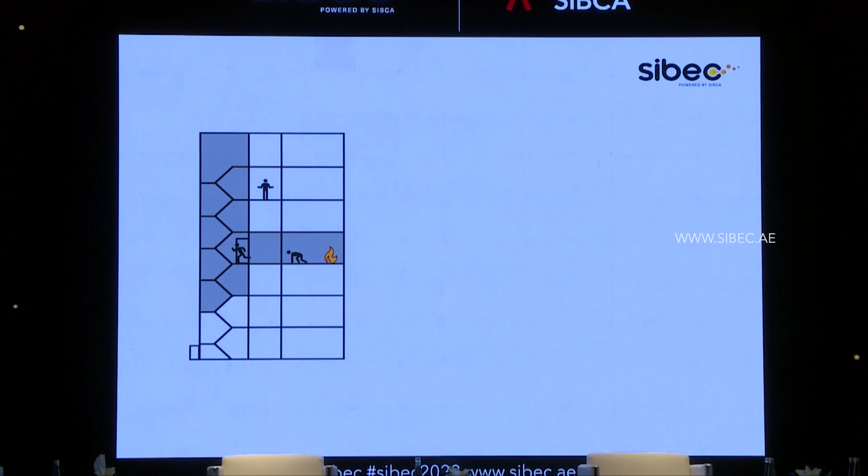So smoke spreads quickly, significantly reduces visibility, increases panic. It makes evacuation very difficult. It makes the firefighting operation very difficult, if not impossible. And for this reason, Fire and Life Safety Code of Practice orders evacuation routes to be protected against smoke penetration in public buildings and in high-rise ones.

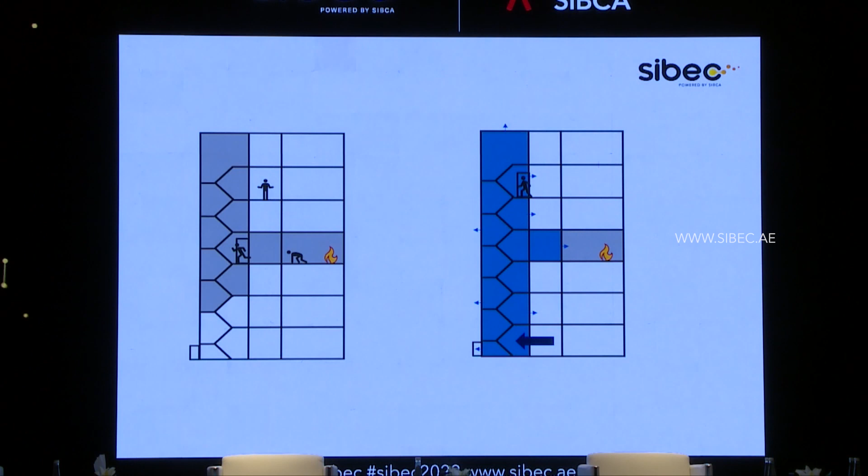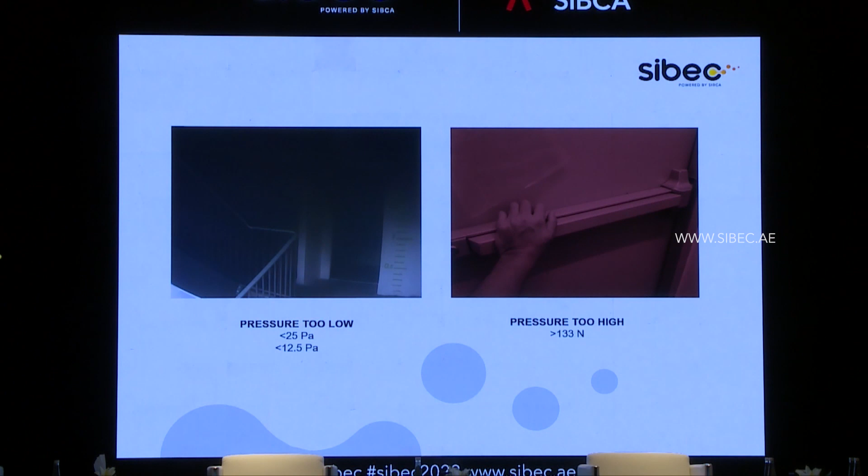To do this, we have to supply certain amount of air into the stairwell space to create overpressure in relation to the fire-affected story. The precision here is very important because the overpressure has to be high enough to stop the flow of smoke if someone opened the door on the fire-affected story, but not too high, so this door can be actually opened. So pressurization system operation is a constant balancing between those two values.

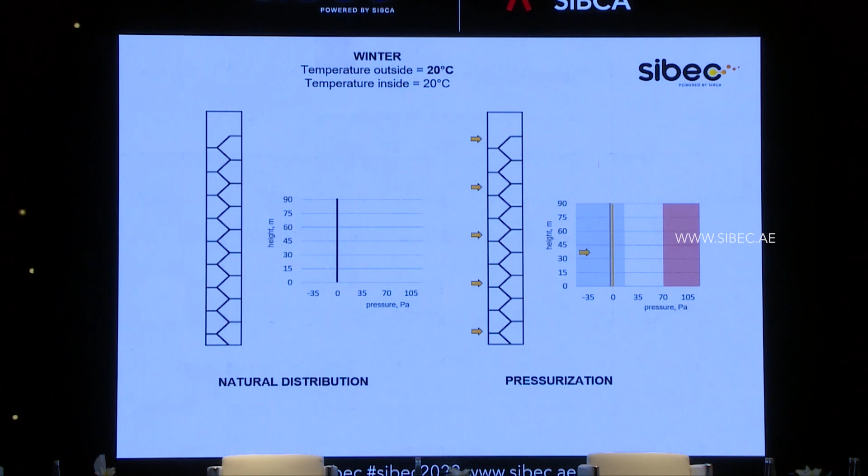Pressurization is very simple under easy conditions. We just supply air until we reach a certain overpressure value. It is like that in isothermal conditions, so when outside and inside temperatures are equal. We in Europe call it spring, but here I called it winter, but you have to be aware that it can occur also during cold night. So the difference between temperature is important here.

And why is that? Because the pressure is affected by many static and dynamic factors, but for tall buildings, it is the temperature that has the greatest influence. It creates something that is called a stack effect, and stack effect is a directed air movement due to a difference of air density.

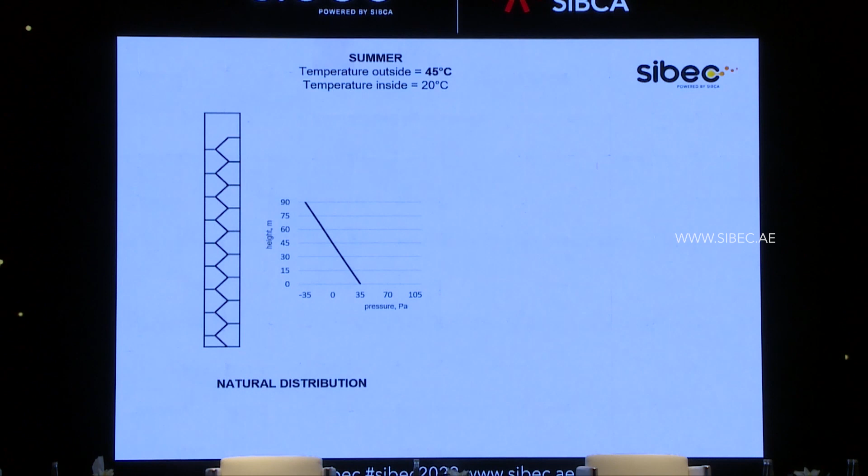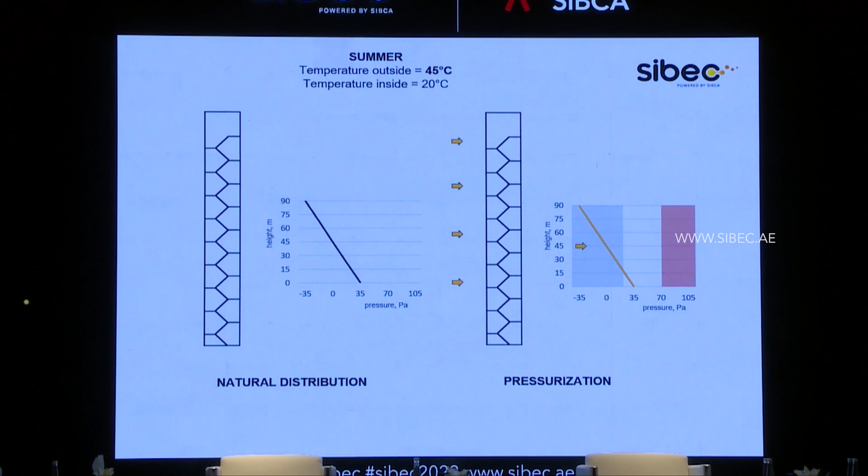In hot climate, the direction is from the top to the bottom. So we have negative pressure at the top and positive pressure at the bottom. And why is it so important? Because if we pressurize the staircase, we move the pressure range, but we don't change the pressure spread. So the difference between top and the bottom pressure is still the same.

The basic way of doing pressurization system is to use a constant flow fan with a pressure relief damper. It is usually located at the top of the building, but in hot climate with this reverse stack effect, it does nothing to mitigate stack effect.

For this reason, to be intellectually fair, I have shown here example of pressure distribution of 90-meter high building with the system with the pressure relief damper on the bottom. And as we can see, depending on the season of the year, of the difference of temperature, straight line is winter and dashed line is summer, we have very different conditions in the building.

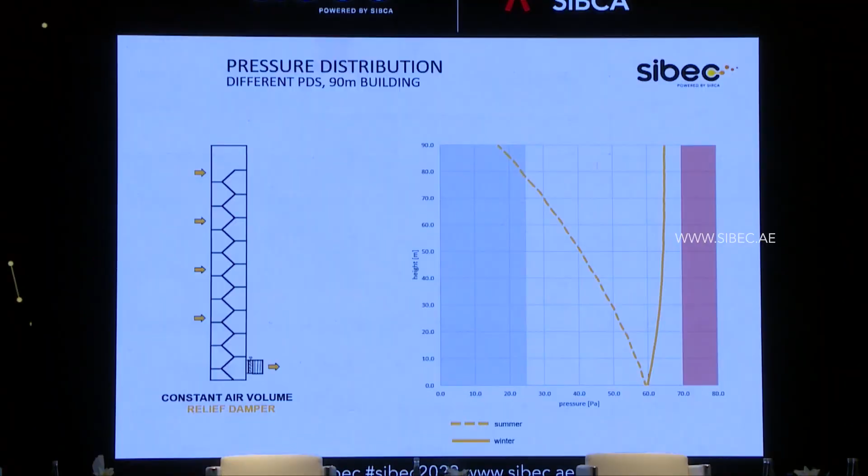And what is the problem with this system? Pressure relief damper controls the pressure only in its surroundings, so it has very limited influence on the pressure in the entire building. And the second problem is that those systems are static, so they cannot respond to dynamically changing conditions in the staircase.

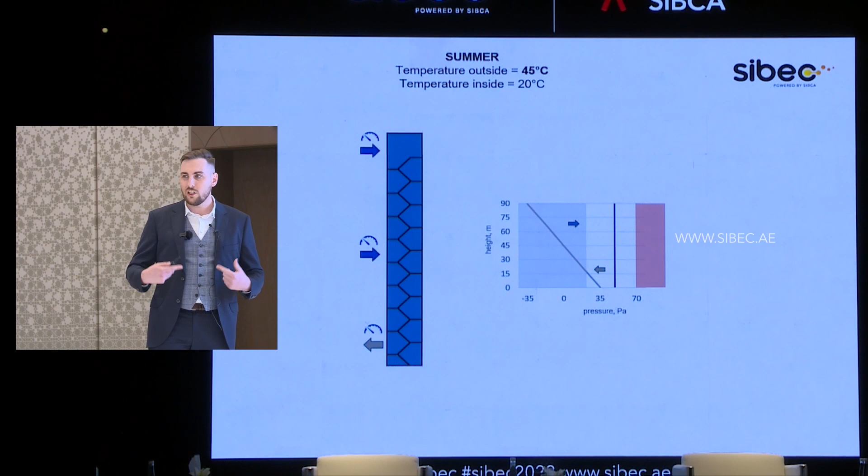The solution we developed and patented is very simple. We supply air to the under pressure zone and extract it in the opposite side of the staircase. But what is also very important, each fan is variable air volume, so it adjusts constantly to the changing condition inside the staircase. And thanks to that, we can obtain even pressure distribution in the entire height of the staircase, regardless the outside temperature.

Thanks to that, we can ensure the best evacuation and firefighting conditions.

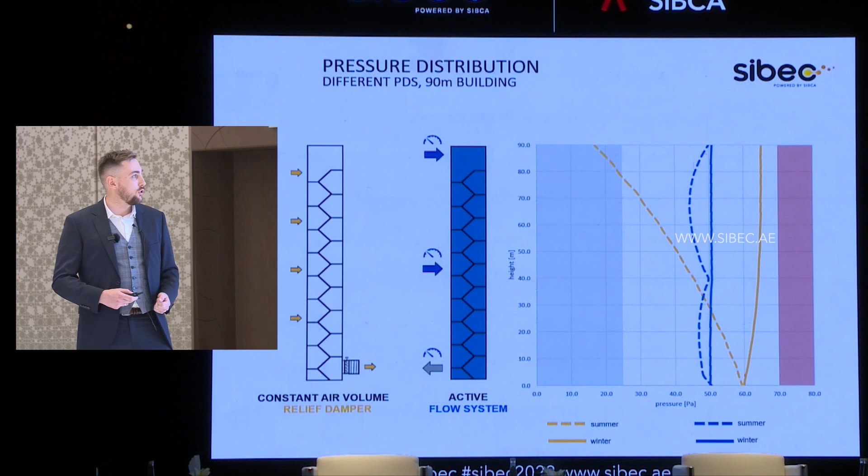And what about super high-rise buildings? Fire and Life Safety Code of Practice orders to divide staircases into sections not higher than 90 meters, or to use a pressurization system that counteracts the stack effect.

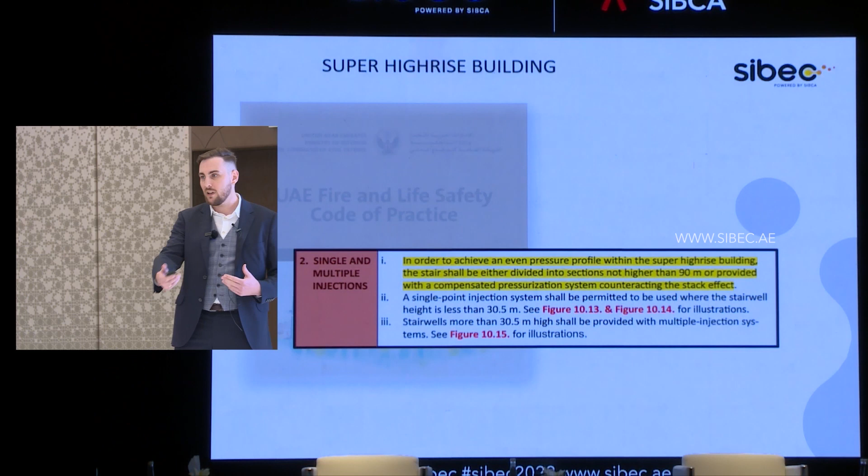And why is it better to use the second option? It is for two reasons. Firstly, we can save the space that would have been used for a second stair and passageways for commercial use. We can have profit from that.

And the second reason is that separation of two staircases creates two pressure distributions, but only as long as those spaces are actually separated. During the evacuation of a skyscraper with hundreds of evacuees, it won't be - as soon as the separation door opens, pressure tends to equalize. So we have one pressure distribution, like in a 180-meter high building.

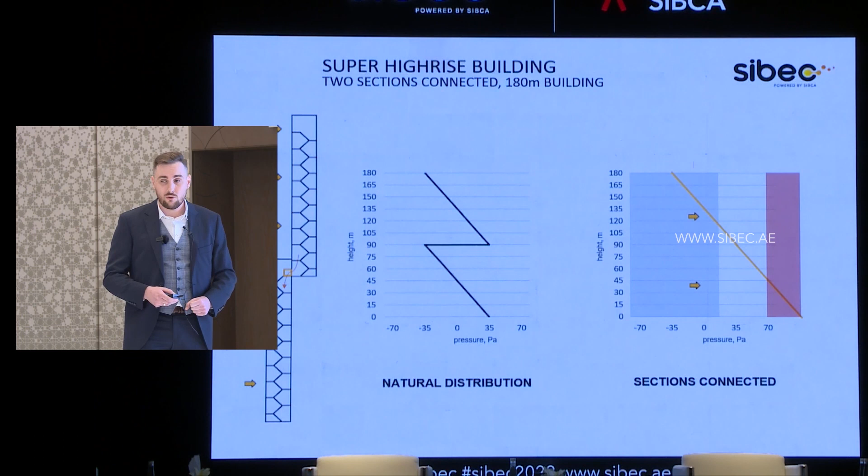Again, when we pressurize it, we move the pressure range, but we don't stop this pressure spread. And pressure relief dampers don't solve the problem, because as we can see here, in a summer situation, if fire is on the top floors, there is a very big risk of incoming smoke to the staircase, while during winter, during a cold night, people here will be trapped regardless of where the fire is.

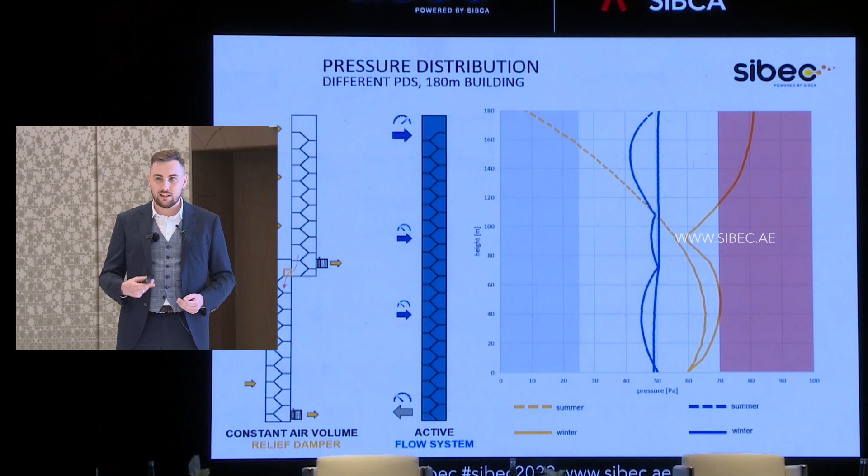Our system can keep the pressure precisely across the entire height of the staircase, and what is more, we don't have to split the staircase, so we can use the spare space.

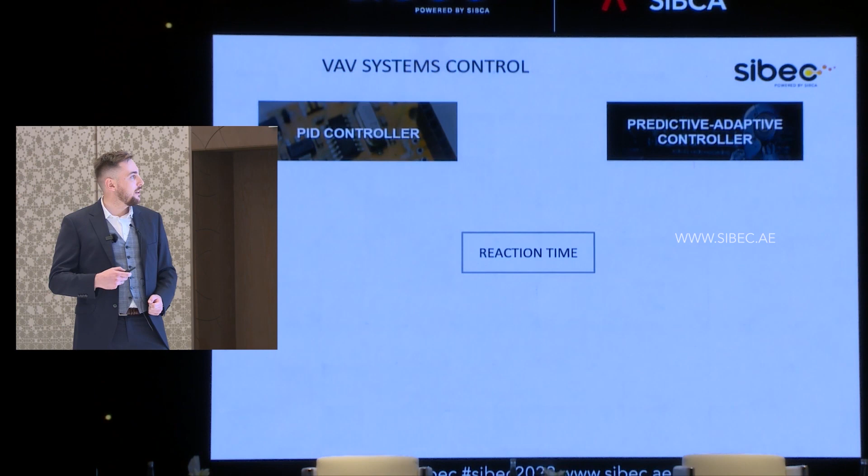As I said before, we have to change the air volume depending on the conditions in the staircase, because someone opens or closes the door and this changes the pressure inside. Usually a tracking controller is used for this, like PID. It changes the output value constantly until the input value, which is the pressure measurement, meets the required value.

It takes time - that's the first thing - but there is also a problem that the faster they work, the more unstable they become. So there is a risk of oscillation if the pressure is changed frequently.

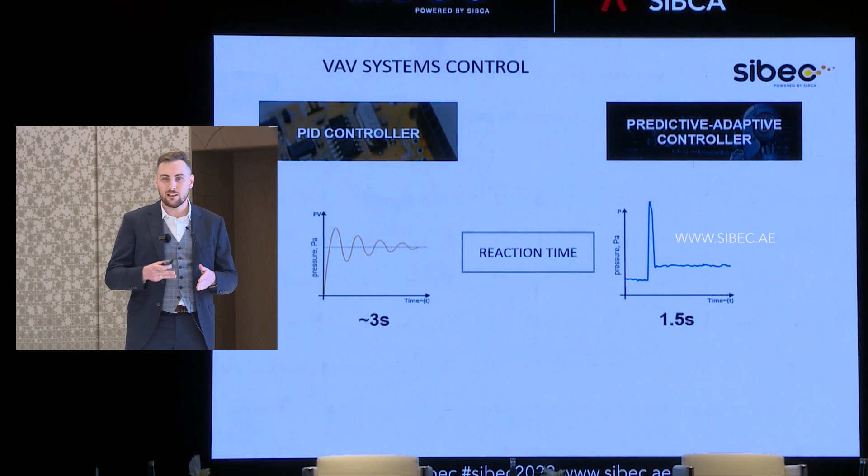For this reason, we use a predictive adaptive controller based on a neural network that is constantly learning. So from the first cycles, our device remembers in which event configuration what frequency it has reached, and thanks to that, in case of a sudden pressure change, we know exactly what frequency we have to reach.

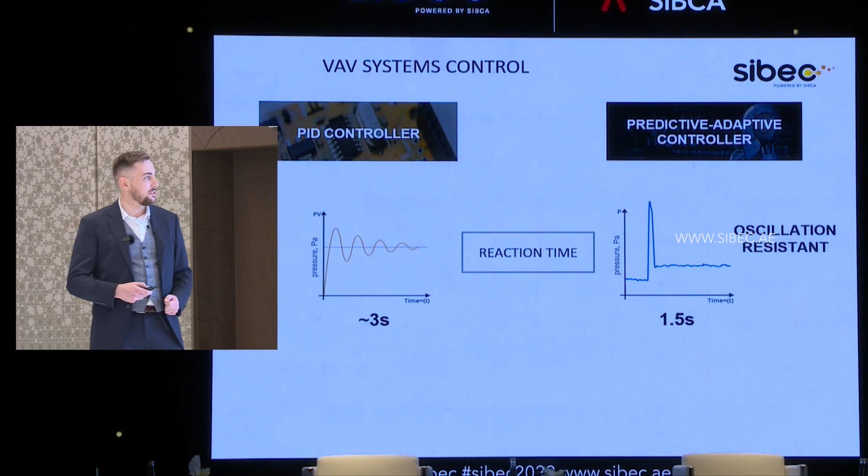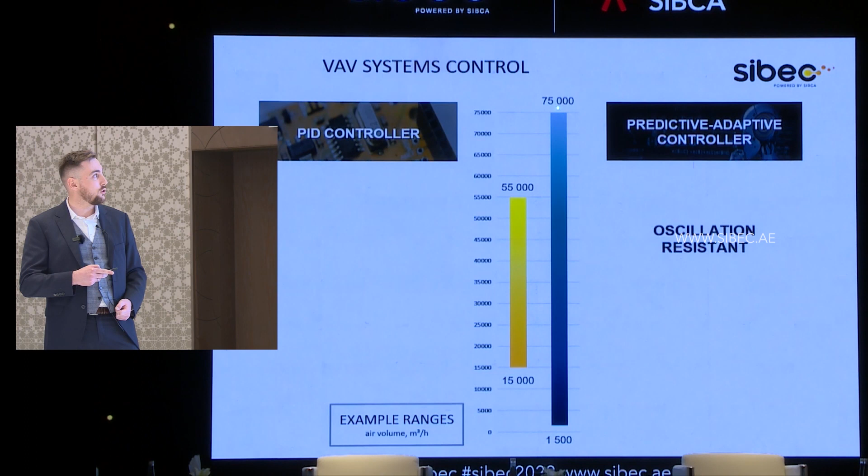Thanks to that, we have a much faster response, and our system is oscillation resistant. What is more, thanks to that, we can have a much bigger operation range. So it gives a lot of flexibility to designers, because they can use the same unit for example for a very small airtight space but also for a very big staircase. There is no problem with that.

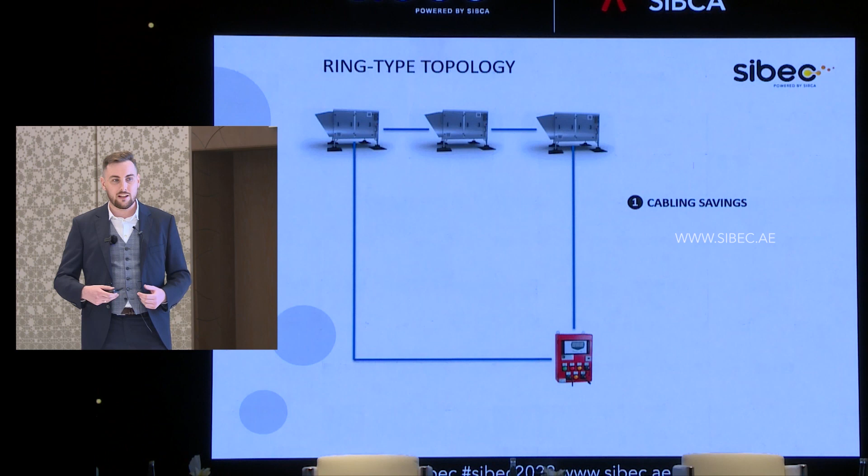In our system, we use a ring type topology, so we don't have to connect each device directly to the control panel, which is a huge saving in kilometers of fire-rated cables, and we can keep the communication in case of loss of one line.

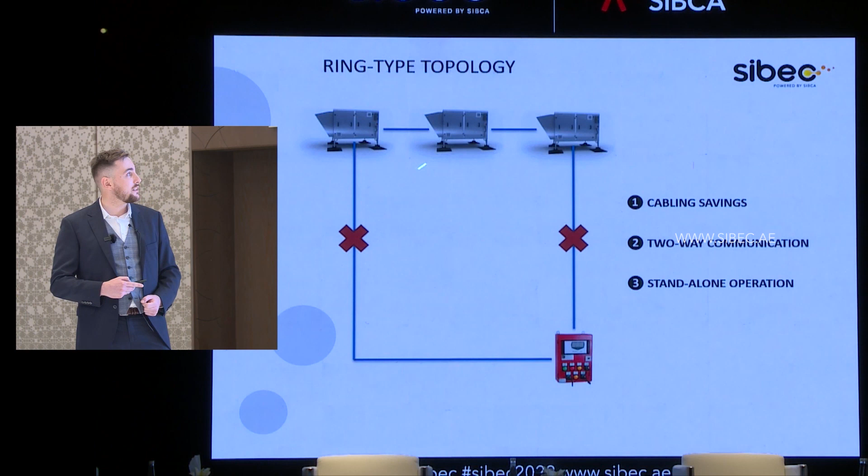But during fire, a lot can happen. So what will happen if we lose communication with the second line, you may ask? To be honest, not much, because our control panel is a fire brigade access point. So they will lose the ability to check data or reset the system, but all of the devices implement the algorithm by themselves, so they will keep going during the fire.

And to be sure that our system will be ready for action, we made it check itself every day. It opens the shut-off damper, starts the fan for a couple of seconds on a few frequencies. Data is collected, recorded, and can easily be printed in the form of a report. Thanks to that, we can eliminate any potential malfunction very quickly, and we can reduce the cost of maintenance and periodic inspection.

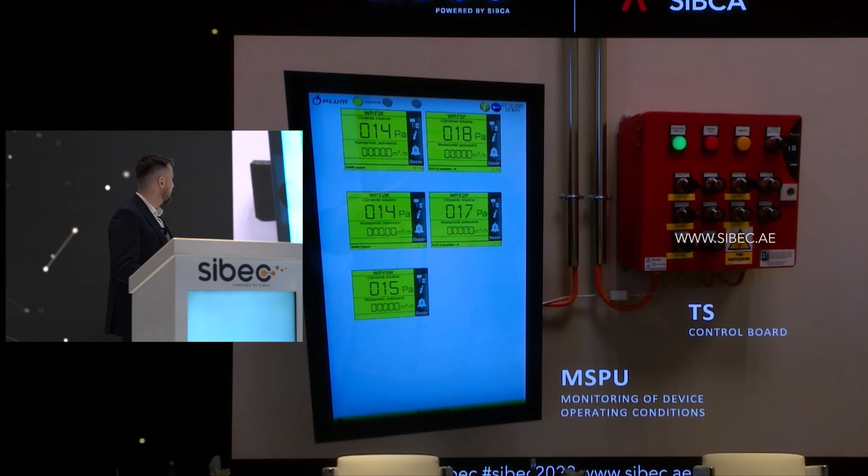For complex systems, we have a touchscreen panel for visualization of the entire system, and if you want to eliminate potential malfunctions very quickly, we can put a remote access router in the building. Then, if there is a need, we can diagnose the system from our headquarters in Poland, fix it if it's a software problem, or give instructions on how to do that if it's something else.

So in Europe we don't build as high buildings as you do here in the Emirates, but SMAY has received a lot of experience and proven the efficiency of its systems on dozens, if not hundreds, of buildings in Poland and abroad, including the highest building in the European Union, Varso Tower. So we are ready for going higher.

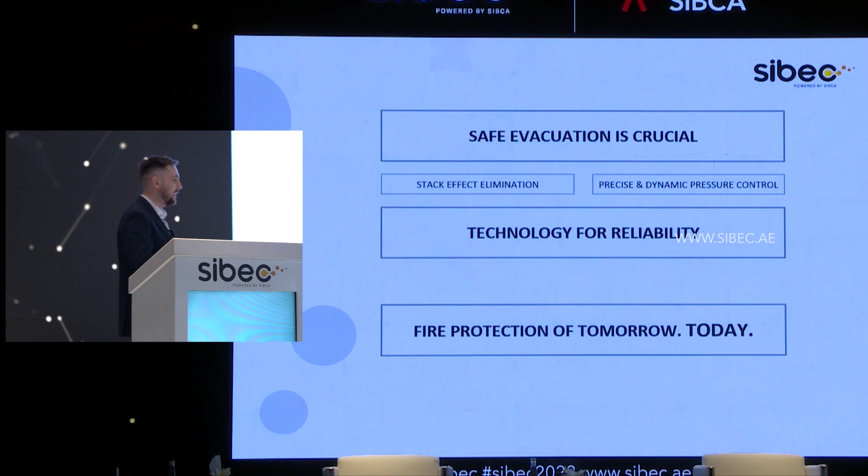And coming back to our leading thoughts - safe evacuation is crucial as high-rise fires are occurring with increasing frequency, and human life is priceless. For this reason, it is so important to use systems that can cope with the stack effect and can respond fast and precisely to the changing situation in the staircase during the fire.

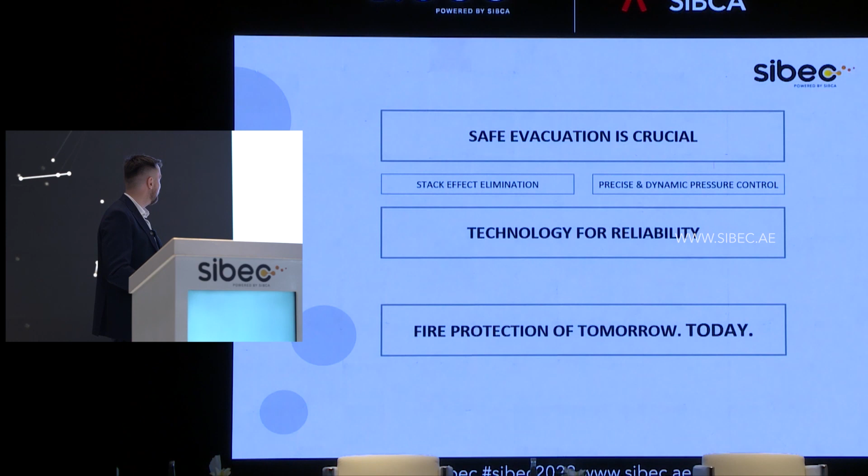And modern fire protection systems, like modern cars, have to be equipped with solutions that not only protect their operation during the most demanding conditions, but also allow for assessing their readiness during standby mode.

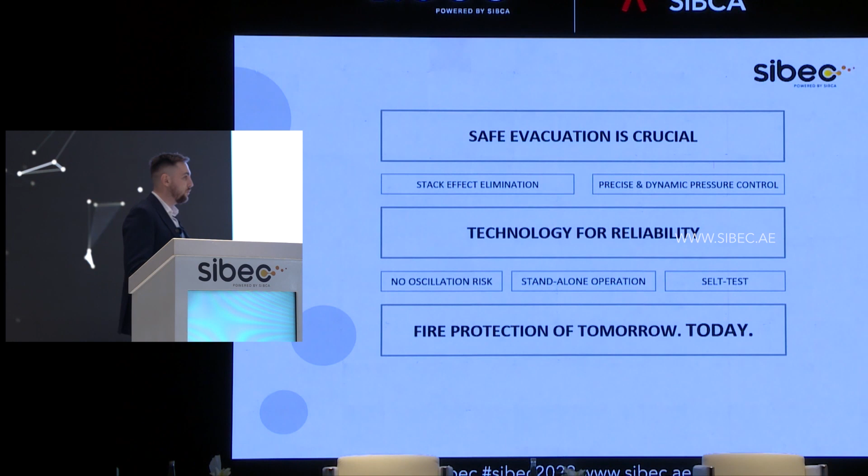For this reason, we have a fast-acting, the fastest oscillation-resistant predictive adaptive algorithm. We are ready for standalone operation if there are two breaks on the lines, and we've made our system self-test every day.